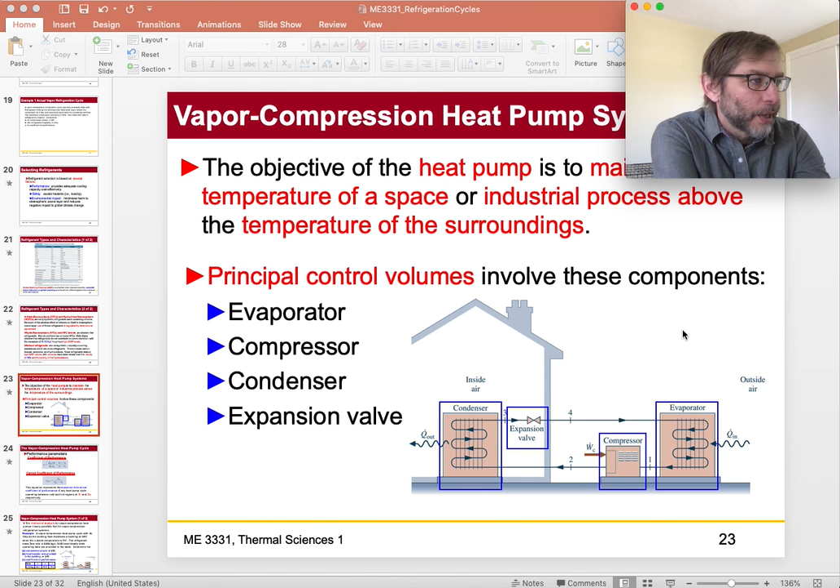In a normal house system, like I have in my house, this is the condenser out here, and this is the evaporator in here. In the case of a heat pump cycle, they're swapped. So the condenser and evaporator are different sides, and you take the heat off the high temperature side and from the cold air outside. It's the same components as a vapor refrigeration cycle, that's why I thought it'd be interesting for us to analyze it.

So the performance parameters of this are, first you have gamma, which is the coefficient of performance. It's the same idea as coefficient of performance of a refrigeration cycle, except here we're talking about what Q out is, not the QH going into the high temperature space, not the QC, which is the heat from the evaporator. So it's the heat from the condenser that we're interested in for a vapor compression cycle.

Okay, Carnot efficiency, Carnot coefficient of performance. This is just looking at the maximum possible coefficient of performance we have, which is TH over TH minus TC, which we'll do a little comparison in our example today. This equation represents the maximum theoretical coefficient of performance of any heat pump cycle operating between cold and hot regions, TH and TC. So if we have an ambient outside and a desired inside, we know what the maximum coefficient of performance can be. So we will do that.

All right, so this is just an example here. The method of analysis closely parallels that for vapor compression refrigeration cycles. It's exactly the same, except the coefficient of performance is a different thing.

So a vapor compression heat pump cycle with R134A as a working fluid maintains the building at 20 C when the outside temperature is 5 degrees C. The refrigerant mass flow rate is 0.086 kilograms per second. Additional steady state operating data are provided in the table, here's some data for states 1, 2, and 3, with the H's. Determine the compressor power, heat transfer rate to the building, and the gamma, the coefficient of performance.

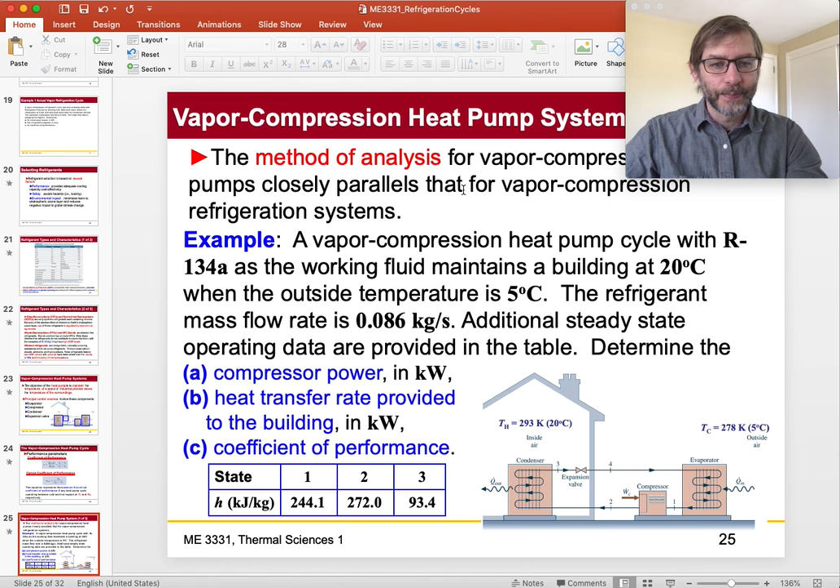Okay, so the compressor power is given the same as what we had before. So there's no heat, right? We always assume that the compressor in the Brayton cycle and the turbine in the Rankine cycle are all adiabatic. That doesn't mean we assume they're isentropic, it means we always assume they're adiabatic.

In this case, WC dot, the power into the compressor, equals m dot times H2 minus H1. Working out the compressor, if you take the values from the table, you have the mass flow and the change in enthalpy, which gives you 2.4 kilowatts as the answer.

The heat transfer provided to the building is the Q out, coming out of the condenser, which then equals, since there's no work because of the heat exchanger, H2 minus H3, which ends up giving 15.4 kilowatts.

Now, if you were to calculate the coefficient of performance, you'd see that the coefficient of performance is something like 6.4.

So 6.4 is what you get with a heat pump. And the maximum theoretical coefficient of performance of any heat pump cycle operating between hot and cold temperatures, respectively, is 19.5.

Now, one thing to notice, if you desire a certain TH, say 20 degrees C, and your TC is getting colder and colder, think about it as a thought exercise: what happens when TC gets smaller and smaller while TH stays the same? The denominator gets bigger and bigger. So as the denominator gets bigger, what happens to the coefficient of performance? It goes down, down, down.

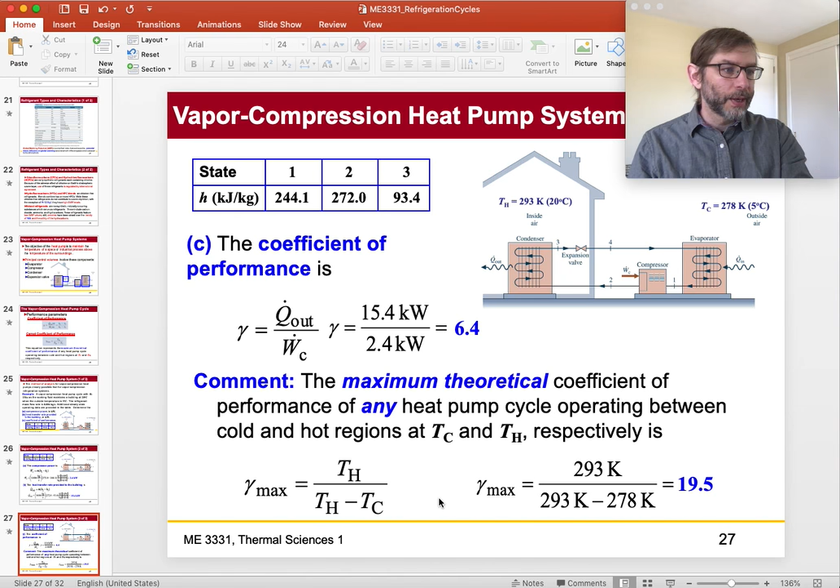Okay, anyways, let's do an example ourselves. I think that's next. Yeah, okay, my example for the day. Actually I have two examples for the day if we can get through them. Let me just get here. All right, so here's my example for the day.

So the figure and table give data for an ideal vapor compression heat pump cycle operating at steady state with R134A, like the previous example, as a working fluid. The heat pump provides heating at a rate of 15 kilowatts to maintain the interior of the building at 20 degrees C when the outside temperature is 5.

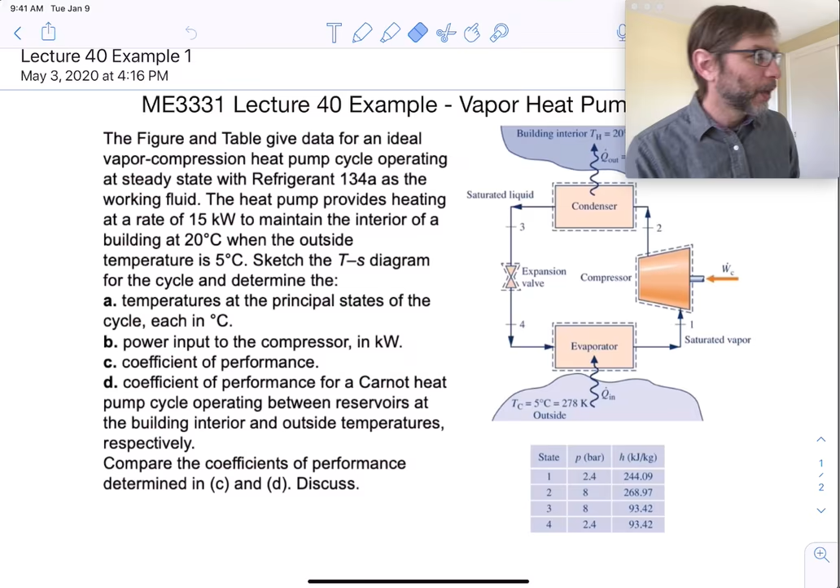Okay, so this is like the exact same thing we just did. Are those the exact same parameters we have in the example? Well, it doesn't matter because we're going to write them out and you're going to see how it's done, and it's going to be fine. So I might have picked an example very close to the one we had, but that's okay.

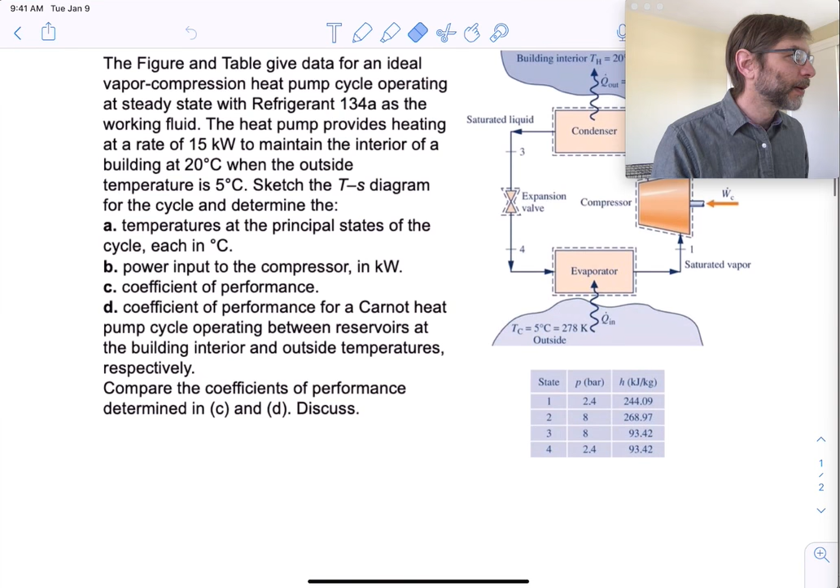Let's just go through it. We get the table here, and the pressures are what they are. So we have certain pressures that we're operating this thing over, which you can see in the table. This thing is giving you all the values, so analyzing it is really easy.

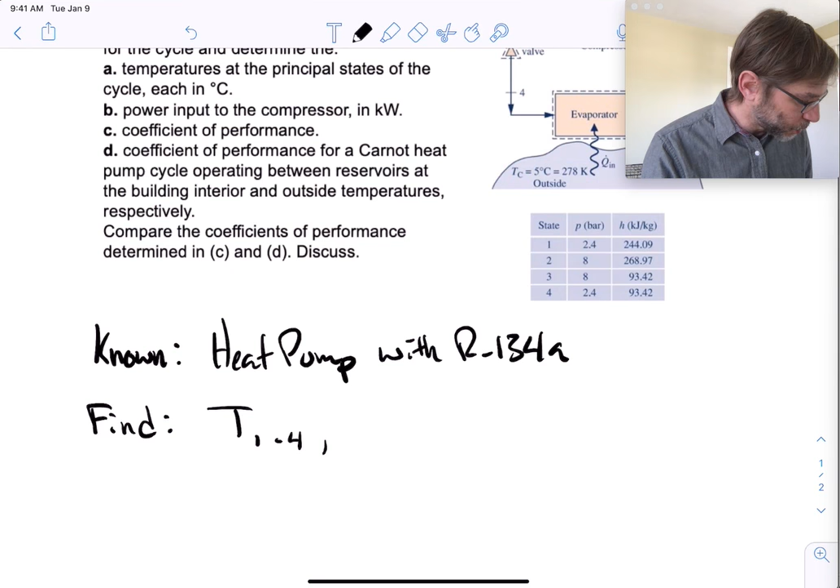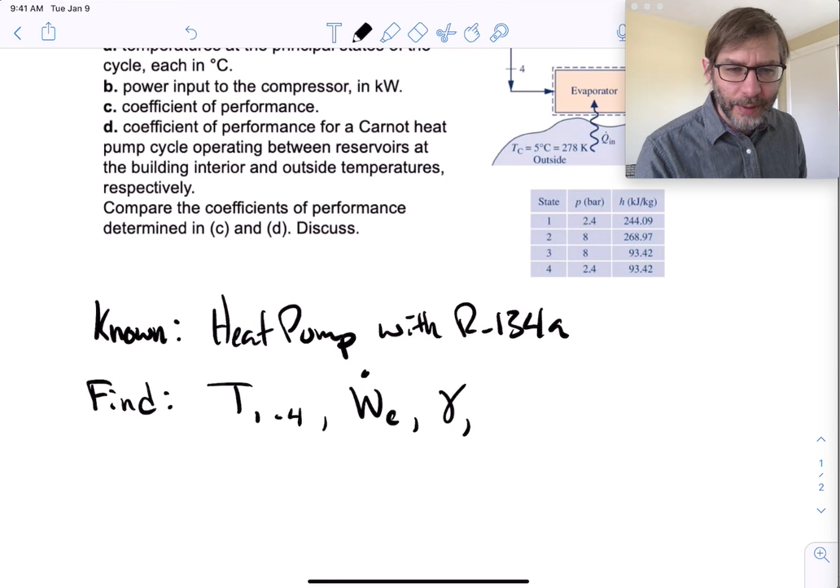So, known: heat pump with R134A. What we're going to find: temperatures at the principal states of each cycle, T1 through T4. We're going to find the power of the compressor, W dot C. We're going to find the coefficient of performance, gamma. And we're going to discuss and compare the results.

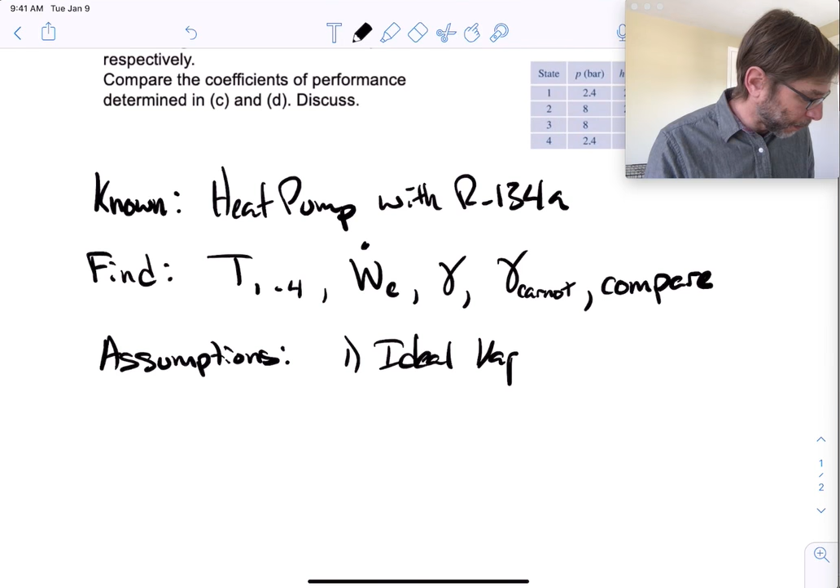Okay, so now let's do this example. Let's see, assume: first, we're going to assume that it's an ideal vapor compression heat pump cycle. Second, we're going to assume that it's at steady state.

We're going to just assume that kinetic and potential energy effects are neglected for an ideal cycle.

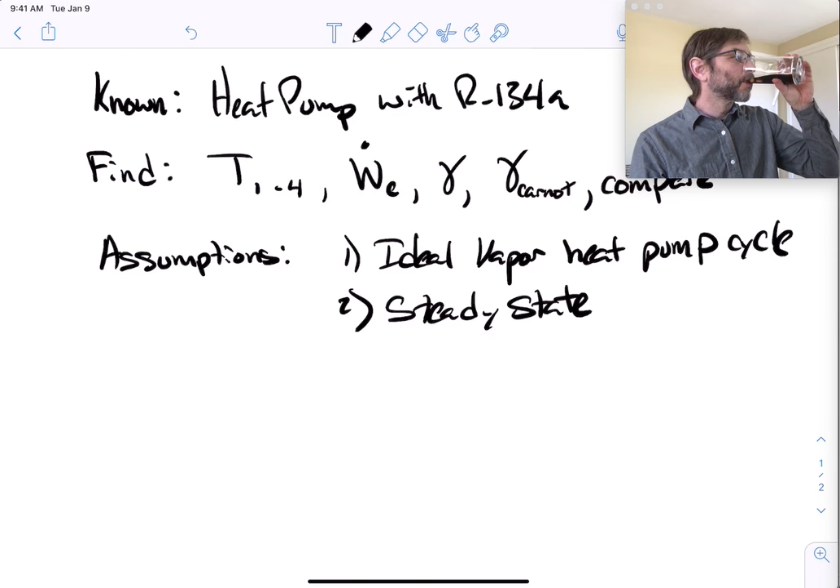It's iced coffee time of year. One of my favorite things.

Okay, let's see. I guess we're gonna do a diagram now. It's not given here—oh, it is, so the system diagram is already given.

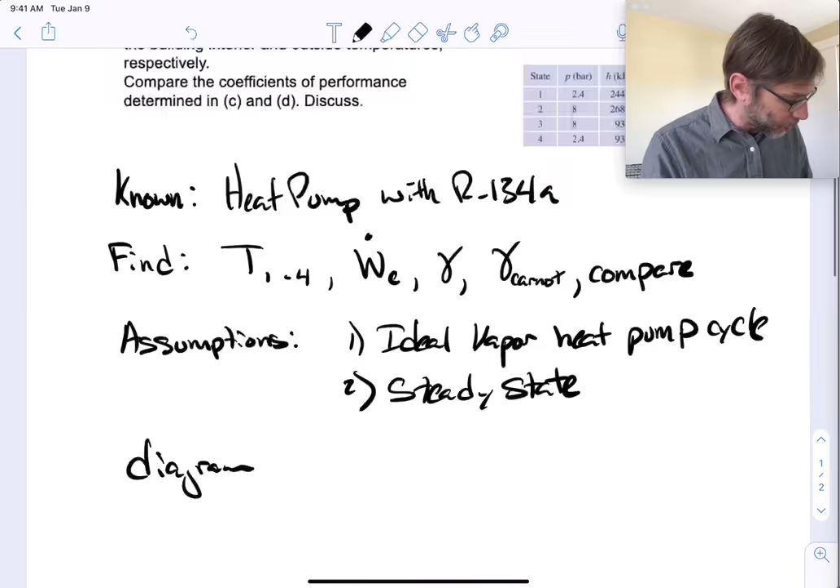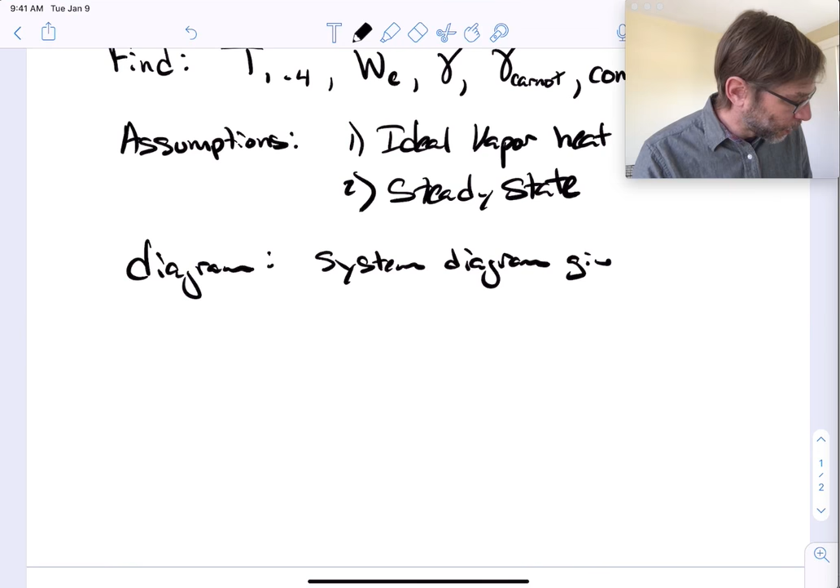I'm gonna just label it system diagram. Given. So the system diagram is given, and it has all the things: the work going into the compressor, the condenser, the expansion valve, and the evaporator.

But we're going to make a TS diagram, of course—we have to do that. Whenever you're doing these cycles, you've got to have a TS diagram. If you're doing the Otto cycle, you can do a PV diagram instead, but I'll specify the kind of diagram I want in the problem on the exam.

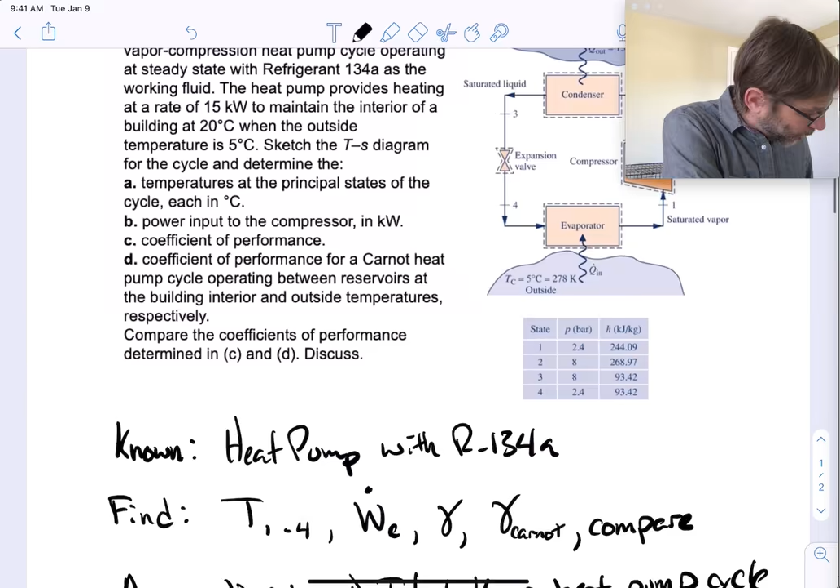So anyways, we've got a system here. It doesn't say exactly what these things are, but we're just going to assume it's an ideal cycle, since we already made that assumption, and something like this.

Remember that you have to make these things right. A lot of you didn't get this totally right on the second exam—this vapor dome thing in the TS diagram. So make sure you get this right.

2, 3, and then remember 4 goes this way. Actually, I'm going to get rid of that—I'm going to put 4 down here.

So 3 is usually right here on the vapor dome, and 20 degrees C has got to be in here, and 5 degrees C has got to be here, something like that.

Let's just put this in a different color—I like orange, so let's do that. Oops, what's going on here? Oh, I had the eraser on.

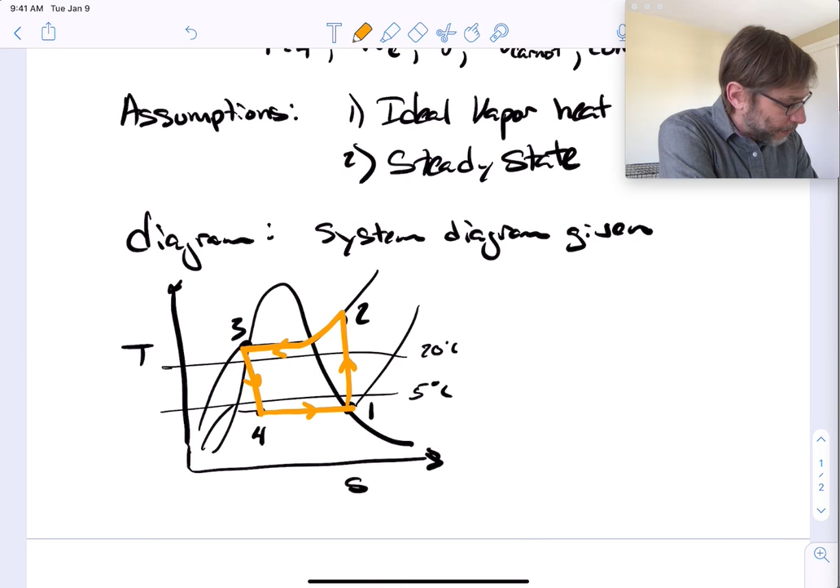Okay, let's do orange. So 1, 2, and then 3, and then 4 is like this, and then like that. It's always good to put arrows in on your cycle. So there's our cycle—that's what it looks like.

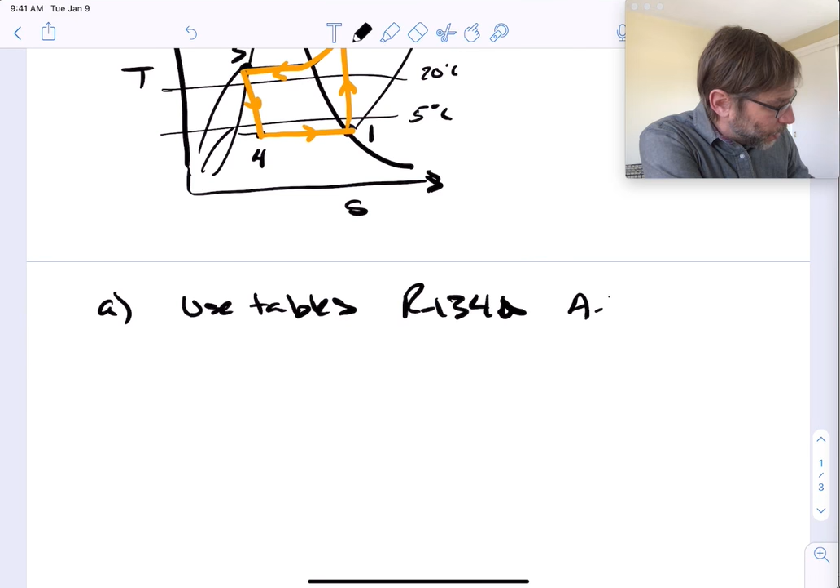All right, now we're gonna do some analysis here. We're gonna use the tables. So for part A, we're gonna use tables—in this case for R134A, which I have in my solution as tables A11 and A12 for superheated and saturated.

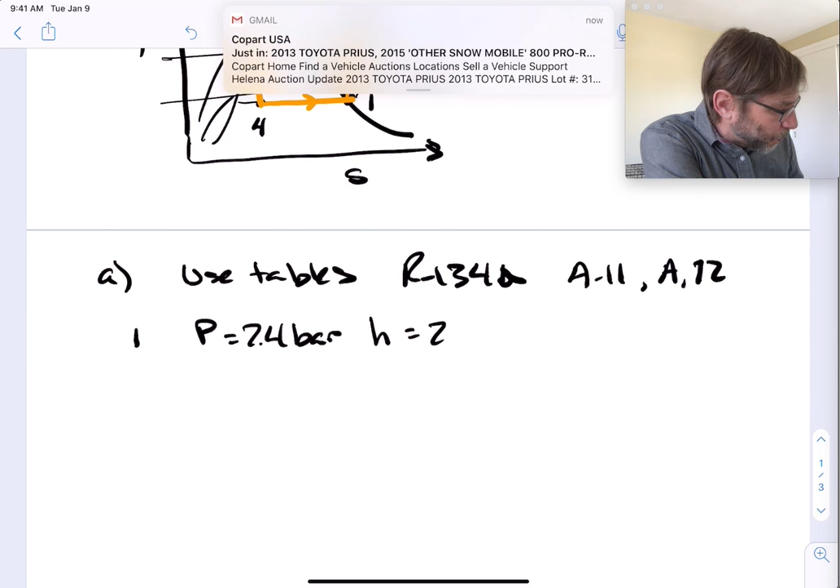So we're going to look at state 1. The pressure is 2.4 bar. H equals 244.09. And we're going to look for saturated, so it's saturated at 2.4—this is state 1.

Saturated, so if we look at this, the temperature equals negative 5.37 degrees C—that's this one right here. Okay, that's T1, H1, P1.

For state 2, we know that P2 is higher—so what did I say? It's 8 bar. So P2 equals 8 bar.

H2 is equal to 268.97, and we know that S2 is equal to S1, because it's an isentropic ideal compressor—we call it an ideal refrigeration cycle or ideal heat pump cycle.

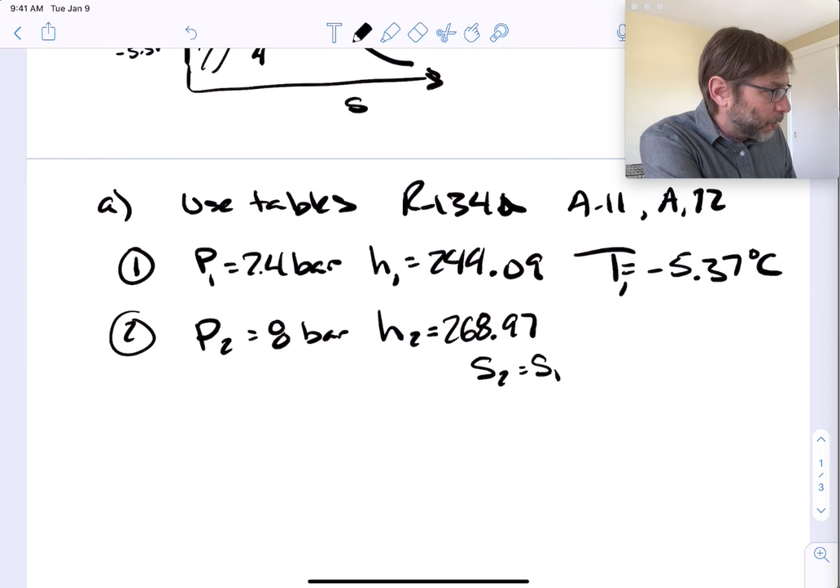So you have those two values, and then you interpolate table A12, and you get T2 equals 35.72 degrees C—that's up here, way up there.

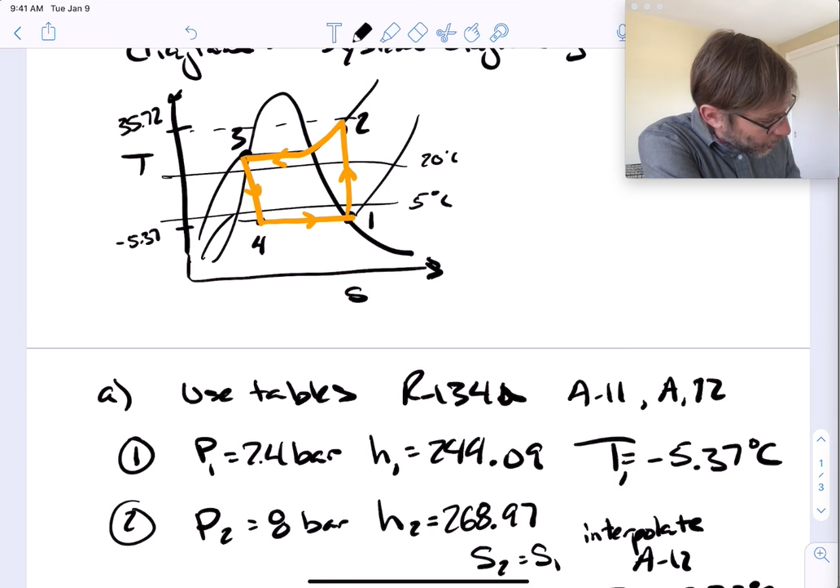And then you've got to come down again into the saturated zone. So P3 equals 8 bar. H3 equals 93.42, and T3 is equal to 31.33.

And of course it's the same—let me do a circle like I did before. We know that P4 equals 2.4 bar, which is the same as what we had at the beginning.

And we know that T4 is equal to negative 5.37, and H4, which is given in the table, is 93.42, because it's isenthalpic—kilojoules per kilogram.

So then we've got all these states, and all the temperatures. Negative 5.37—oops, I forgot to put the negative. Okay, degrees C. Here, and this is degrees C too, so it's a little colder, right?

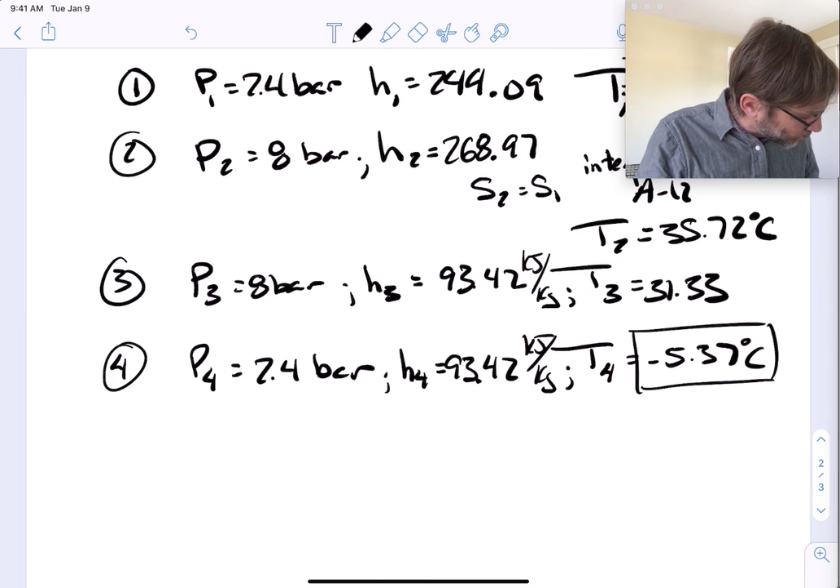31.33, which is like right here—31.33, right there. Okay, so that's all the temperatures that you need to find.

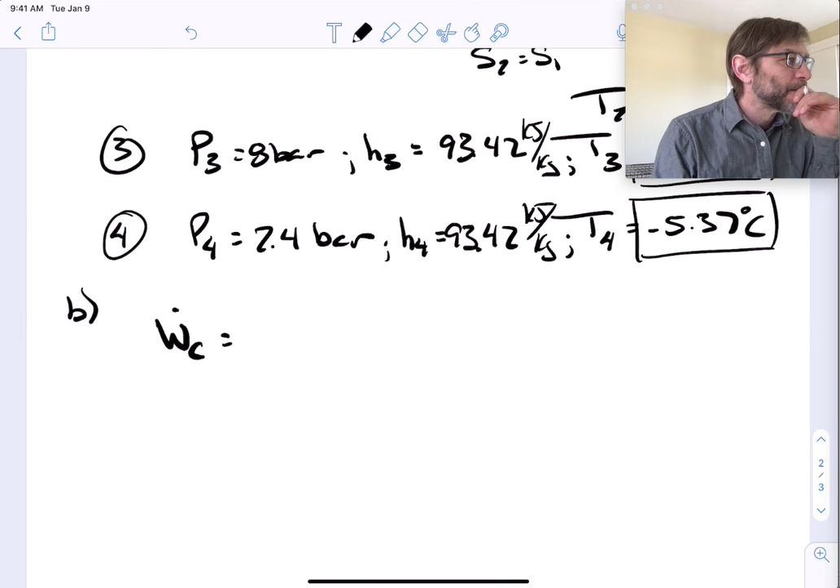Okay, part B. Part B is to find the power into the compressor. So W dot C is equal to, yeah, we have to find the mass flow rate. Well, we know it's M dot times H2 minus H1. If we want the compressor to be positive, even though it's a negative, it's going into the control volume.

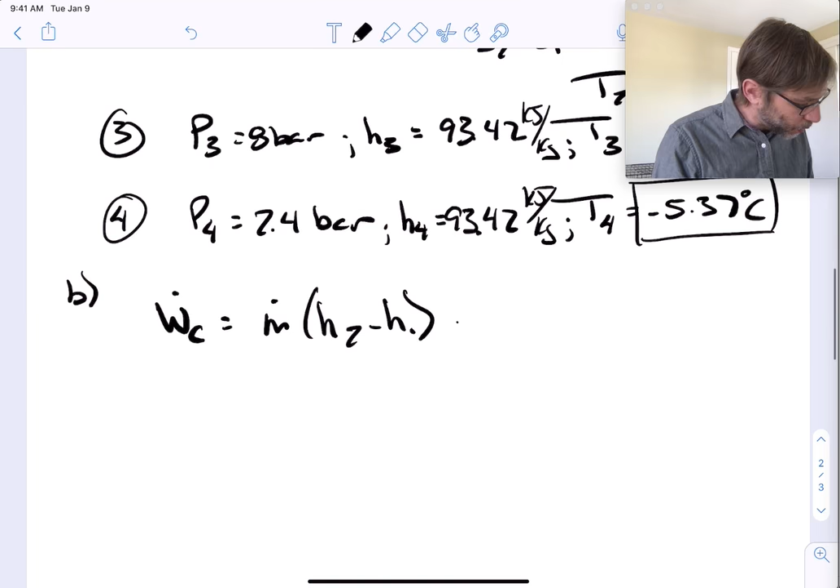But we know, what do we know? I think we know one of the heats: 15 kilowatts. Heat pump provides a rate of 15 kilowatts, so heating at a rate of 15 kilowatts. So that's QH, right? So we need to find this.

So we know that Q dot H is equal to M dot times H2 minus H3, right? Because that's the QH, and then we can find M dot this way because we know the H's and we know the QH. So if we let me just put a here, and we know that M dot is equal to QH dot over H2 minus H3.

And then if we put some numbers in here, now this is 15 kilowatts divided by 268.97 minus 93.42. And if we do that math, you get 0.0855 kilograms per second. Okay? So that's what we get for the mass flow rate.

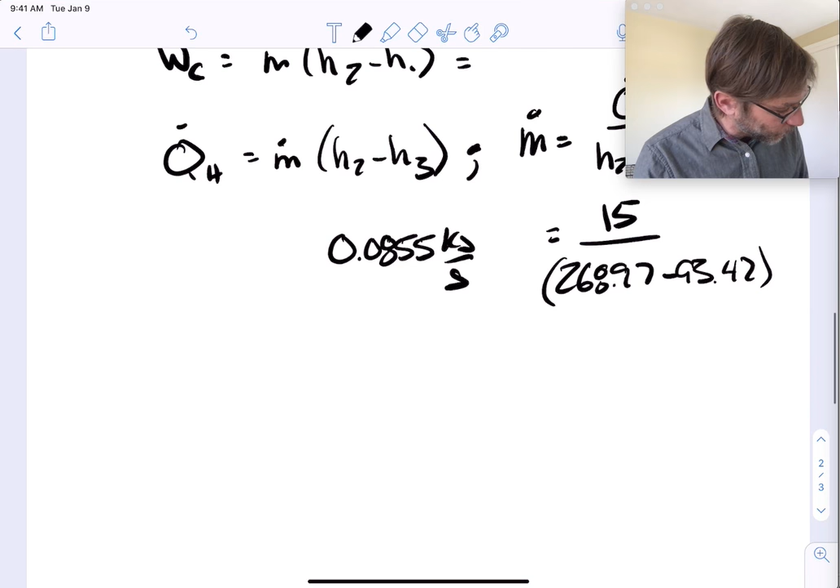Now, if we have that for the mass flow rate, now we can plug this back in. So 0.0855 times H2 minus H1, where H2 is given up here. H2 is 268.97 minus, what is it? H2 minus H1, which is 244.09. Right, and I'm going to run out of room, of course. I should have left myself more space, which is silly.

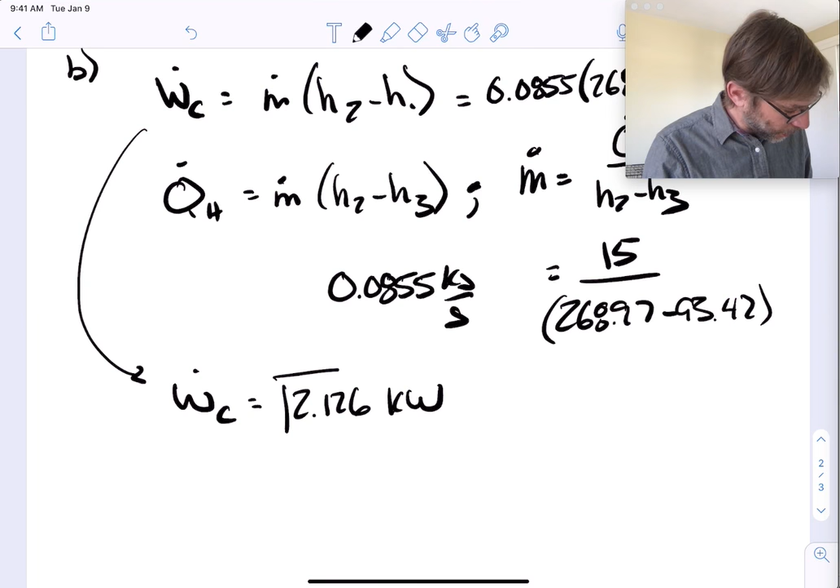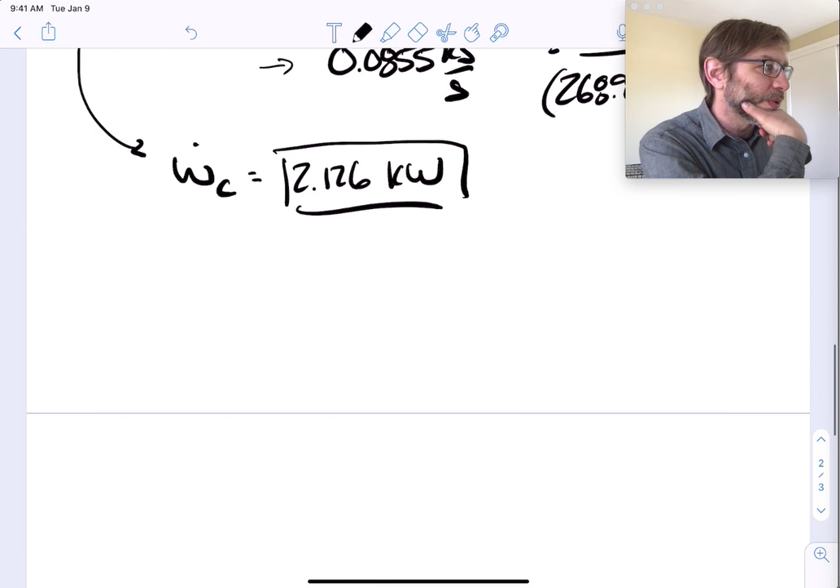Let's see, so I'll just go W dot C is equal to 2.126 kilowatts. Okay, so you see what we did. First thing we did, we found the mass flow rate, and because we had the heat, we could find the mass flow rate. That's just like one of those kind of investigative things you need to learn how to do with cycles. Okay, look at the things you're given and figure out how to get what you need. Okay, okay, so that's B.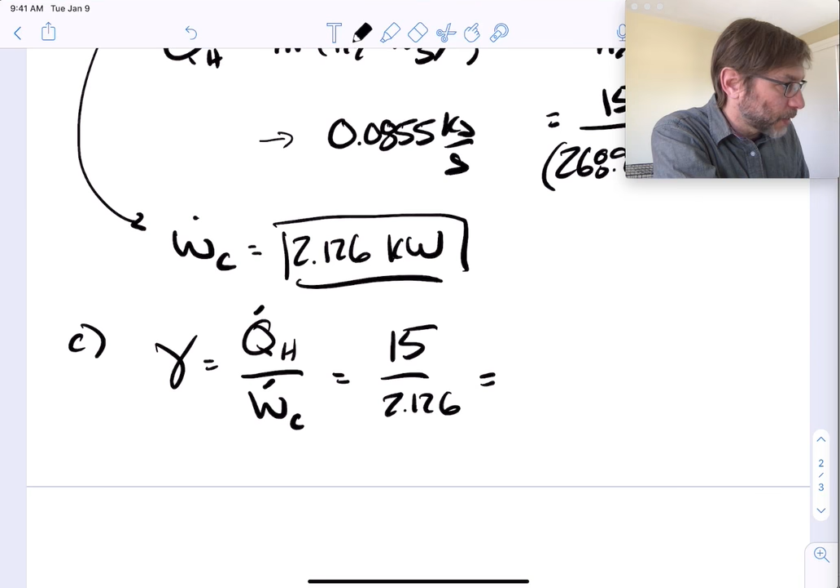C was to find the coefficient of performance. So this is QH, or what am I calling it? Am I calling it QH? Yeah, I'm calling QH. QH dot over WC, and so this, we know this is 15 over 2.126, and that's pretty high. 7.056 is our coefficient of performance.

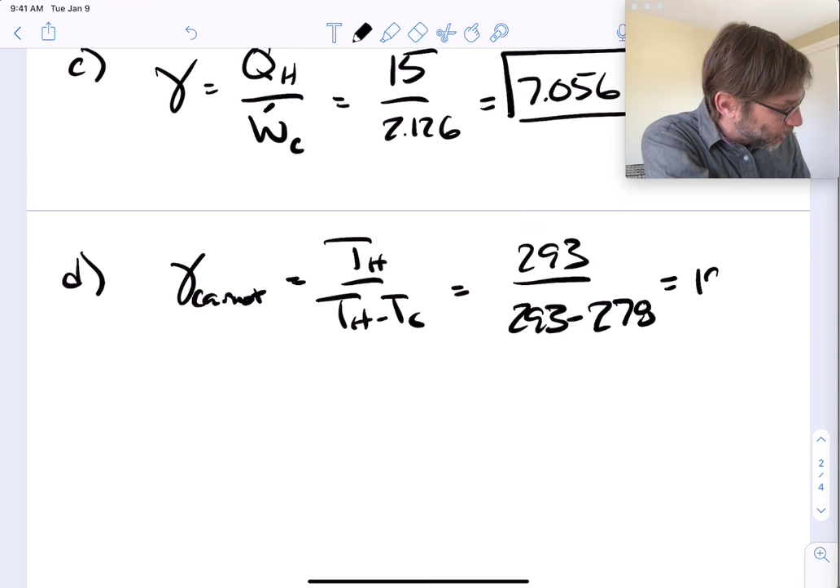Okay, let's see. Now D, of course, we said that the Carnot is TH over TH minus TC for the heat pump. And this is giving us 293 over 293 minus 278, which is the same answer as we got in the slide example, 19.53. So that's the ideal coefficient of performance.

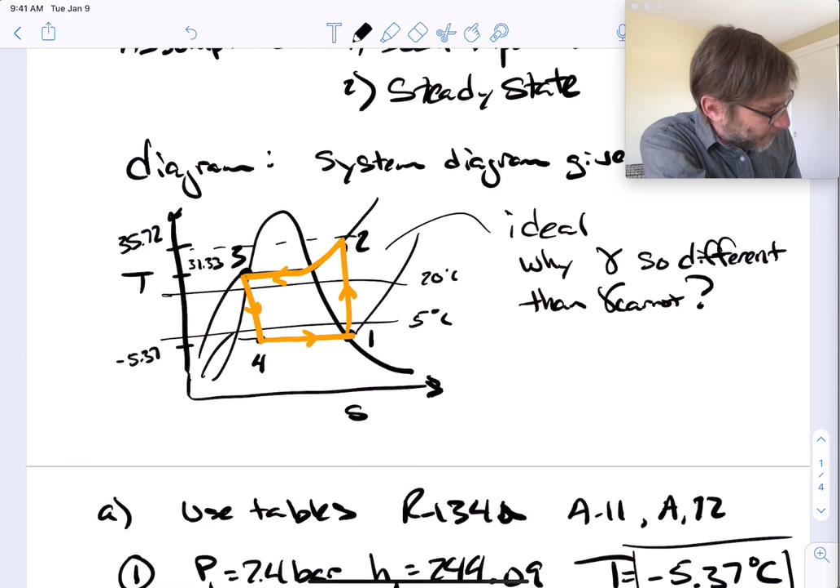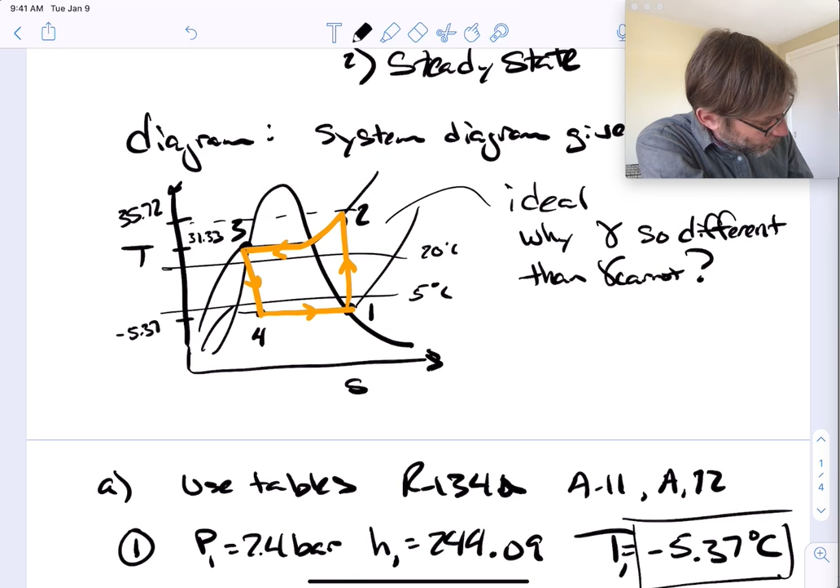Well, one of the reasons is because this is not constant temperature at the top, right? The Carnot cycle would be like maybe at an average. So let me just do this down here. So this is the discussion. I'm going to put the TS diagram here like this. And then what I'm going to do is I'm going to write our cycle in orange, okay?

Our cycle in orange is like one, oops, not like that. Like this: 1, 2, 3. Okay, 1, 2, 3, 4, right? Okay, so that's our Carnot. That's our actual refrigeration cycle. The vapor refrigeration cycle for a heat pump, okay? It's the same cycle, right? Heat pump, refrigeration cycle.

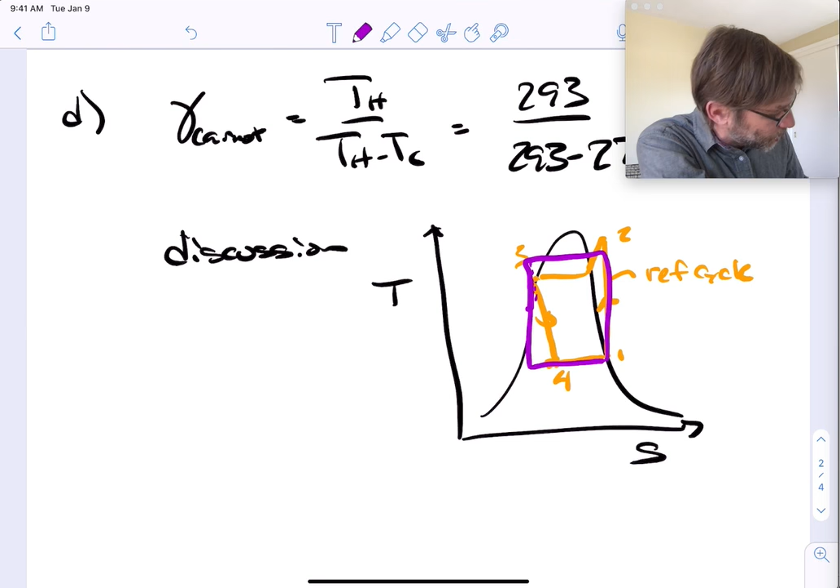Now, if I put this one in sort of purple, okay, the ideal cycle would be something like this. So maybe just pick the average temperature here, right? So I'm just going to draw it. Maybe I'll just draw it straight up like this. Okay, so anyway, so this is the Carnot. You can see that there's some area here. It's missing, right? That the vapor refrigeration cycle doesn't have. And that missing area is what's responsible for the poor coefficient of performance of the actual, right?

So because we can't actually keep an isothermal, so this is isothermal, TH equals constant, and this is S3 equals S4. So technically there would be some kind of isentropic compressor or turbine in here to get to 4. So 4S, for example, right here. Now, we could do that. It would be a little weird. You could go from 3 to 4S. I mean, so 3, this is 3S, right? If you could possibly go straight across the vapor dome, which you can't do.

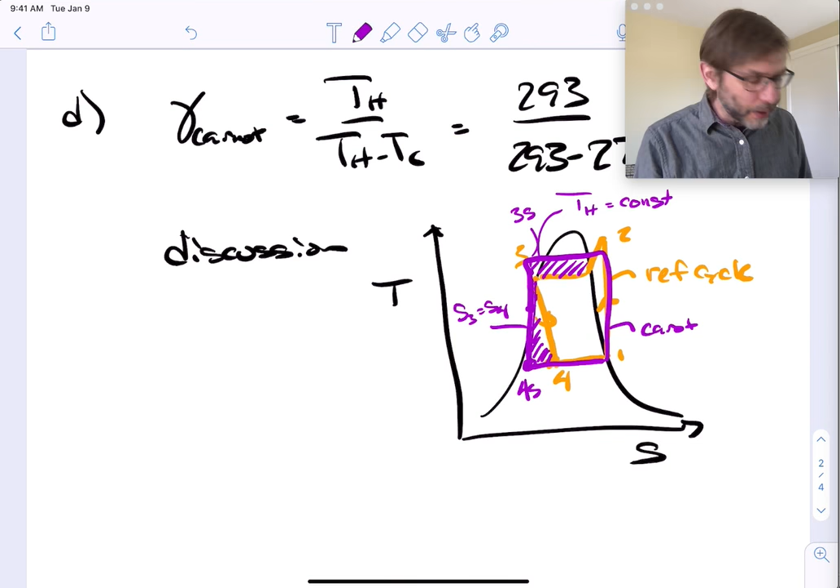So anyway, for 4S you could actually have an isentropic compressor or isentropic turbine in a vapor refrigeration cycle. The problem is that thing needs to operate in two-phase flow, and this is really liquidy over here. Like liquid, okay? So you can't have a turbine operating in liquid. It just wouldn't work. If you could figure that out, maybe you could get a few points of coefficient of performance and have a much more efficient system.

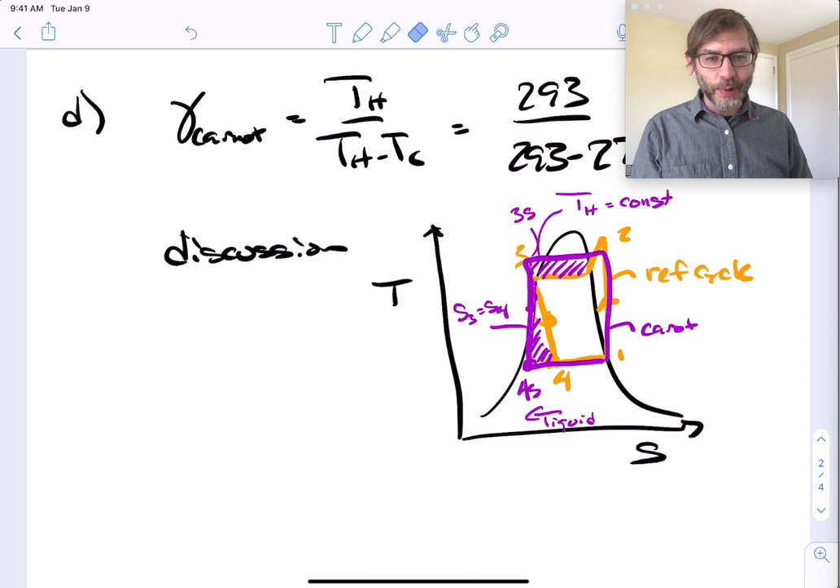The problem is having that thing operate in two-phase flow is just not going to work, and it would damage whatever it is, and you would never be able to expand it, and it wouldn't be worth the money. You wouldn't get anything out of it. The efficiency would be poor, so you might as well just put a valve there. That's the reason. There's more area under the curve there - you get more cooling capability or heating capability depending on how you run it.

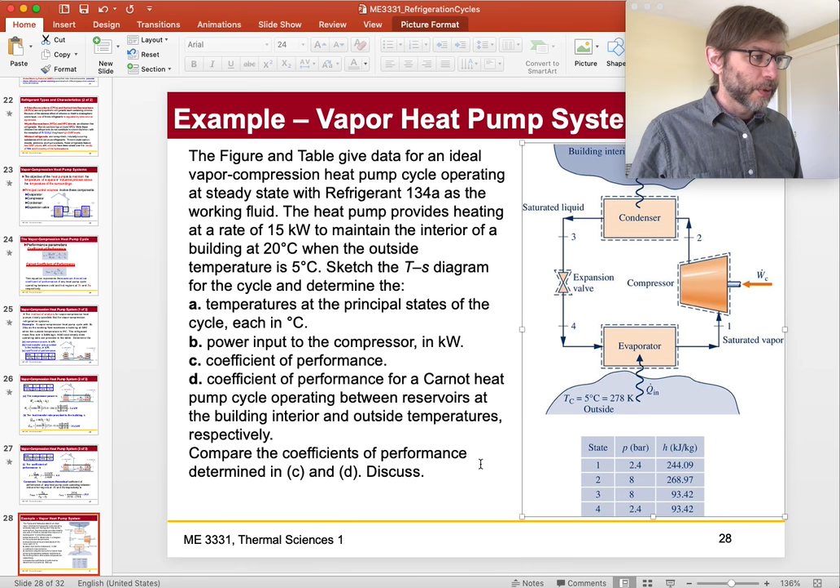Okay, so where are we at time wise? 30 minutes. So let's do one more thing. Okay, so that's the vapor heat pump cycle. Please review it, it's an important thing to go through. Let me get rid of this and make my slides bigger.

All right, now let's talk about one more thing: the Brayton refrigeration cycle. Just like we can operate the Rankine cycle backwards to do a refrigeration cycle, we can operate the Brayton cycle backwards too, using air or gas as a working fluid. So it's an ideal gas cycle, not a vapor refrigeration cycle. The working fluids of a vapor compression system undergo liquid vapor phase change. In a Brayton refrigeration cycle, the working fluid remains a gas.

The Brayton refrigeration cycle is the reverse of the Brayton power cycle introduced in Chapter 9, and it looks like the following. Essentially you've got a compressor-turbine situation. Instead of constant temperature, they're adiabatic and isentropic, and reversible, so they're isentropic. Of course there's maybe realistic behavior, so that's why the dotted line is here. And you've got constant pressure heat exchangers, so they're not constant temperature processes, but you've got a pretty good cycle here. It's going to be a lot different than the Carnot, but it's going to give you some cooling effect.

So you run it backwards. You put some heat in here, you put some work rather inside the compressor. You might regain some of the power in the turbine, like what I was talking about possibly doing with the vapor refrigeration cycle. So it goes like this.

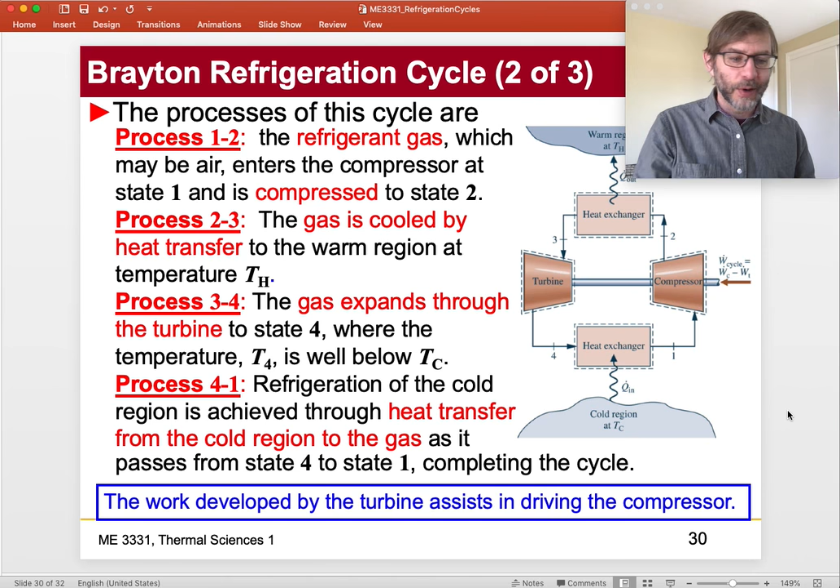Never actually operated one. The Brayton refrigeration cycle's coefficient of performance is given the same as it is for the vapor refrigeration cycle: it's the Q in, which is the heat transfer from the cold region, the room or whatever you're trying to cool, into the heat exchanger, over the difference in work. In this case it's not just one work, the compressor work - it's work minus the turbine work. So the turbine actually gives you some benefit, extracting some work which you then feed to the compressor, giving you TH minus TC.

So you have to keep the TH below state 3. State 3 is the point at which you have this heat exchanger. So the TH has got to be below there, and the TC has got to be above 1. So you see, there's not much of a difference in temperature between TH and TC.

So this may be really only very useful for systems where the temperature difference is not very high. Okay, and that's what we'll probably come to here in the end. Okay, so let's just do an example of it and see how it works. And this will be our final example over the day. Hopefully we don't run over time.

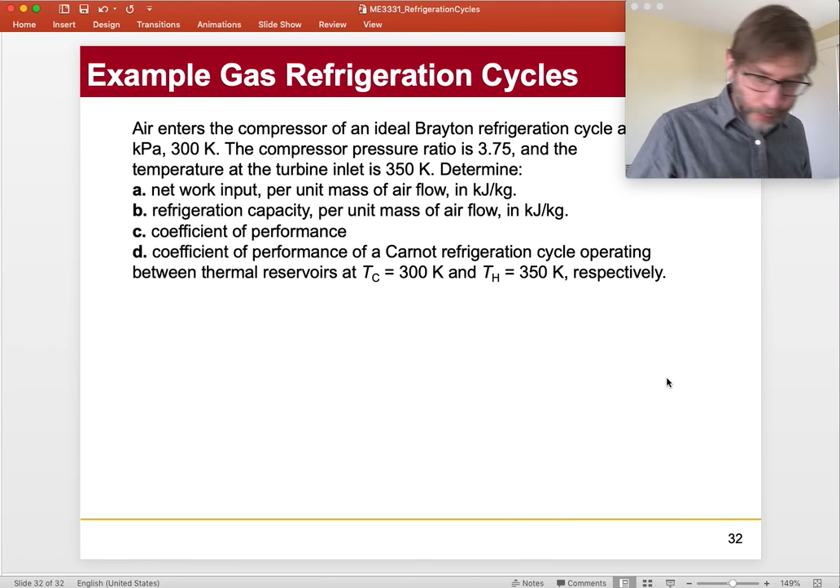So example 2, let me go here. Here it is. Okay, gas refrigeration cycle. The air enters the compressor of an ideal Brayton refrigeration cycle at 100 kPa and 300 K. The compressor pressure ratio is 3.75, and the temperature at the turbine inlet is 350 K. Determine the net work input.

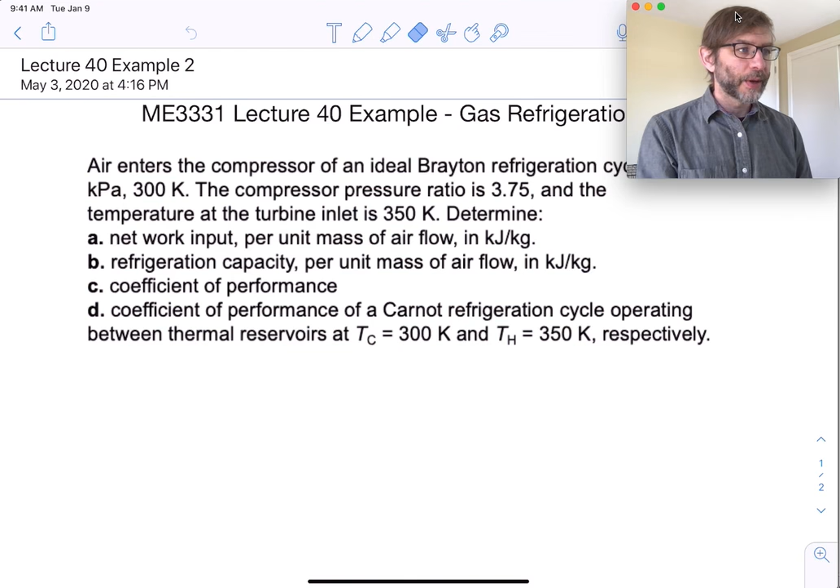So yeah, we got to put work in. We're not getting net work out of this cycle. Per unit mass flow, in kilojoules per kilogram. Refrigeration capacity - remember the capacity, that's the Q in, right? Capacity is what we're pulling out of the cool space. Coefficient of performance of an ideal Carnot refrigeration cycle operating over the same 50K.

Okay, so what do we got here? Okay, so known - let me get to my right thing here. Okay, so known is what we have. We know we have here is a Brayton refrigeration cycle. Okay, we'll just say with air. Is it air? Oh yeah, air as the working fluid.

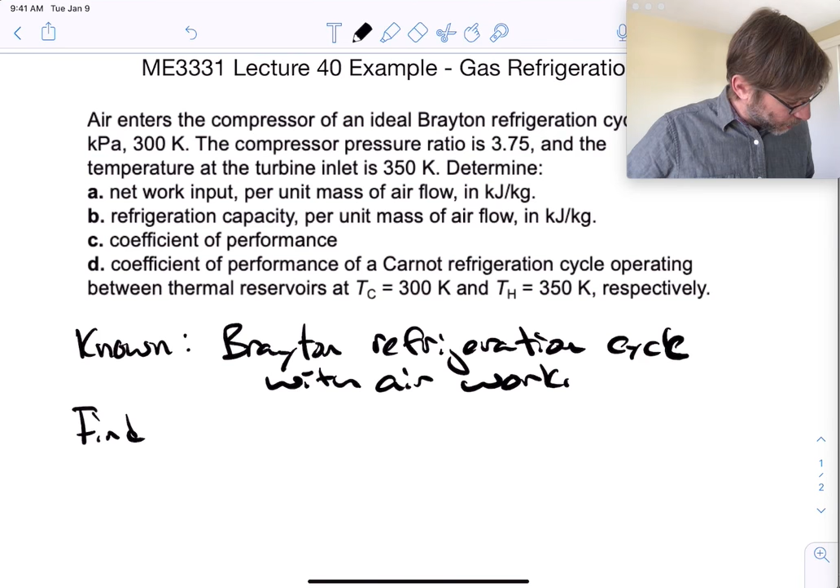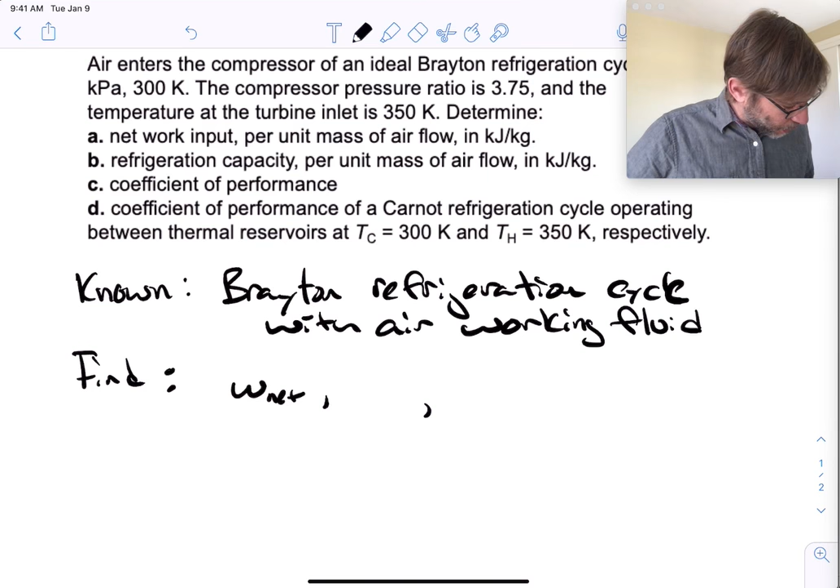Okay, what we're going to find is the net work. So work in, or just call it work - well, we're going to call it work net, because the net work is the compressor minus the turbine, right? Refrigeration - this is Q in, kilojoules per kilogram. We're going to do this per kilogram, with little w's. Okay, Q in and coefficient of performance - so this is a refrigeration cycle, so we're going to call it beta, and we're going to call this one the Carnot coefficient.

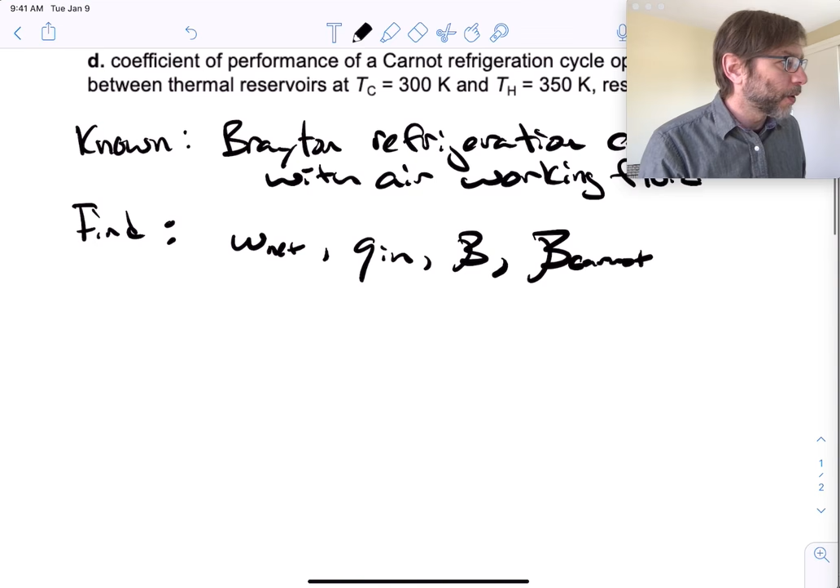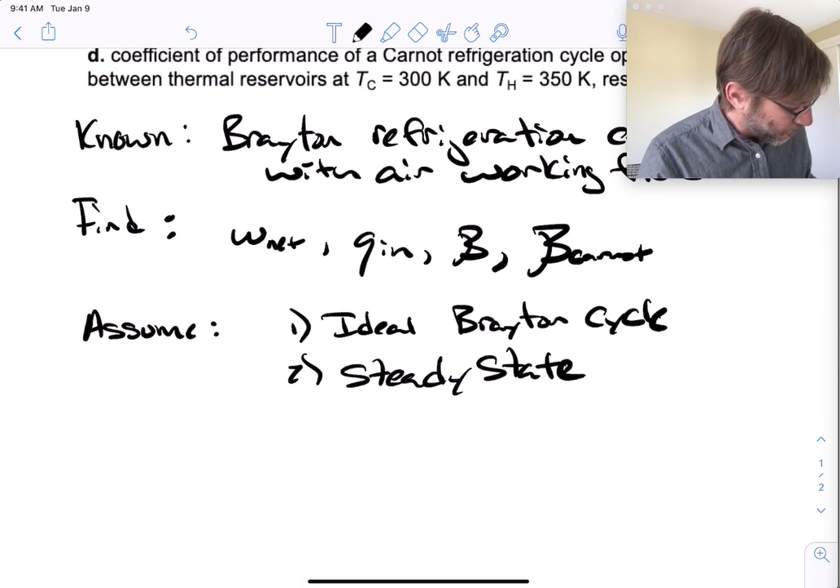Right, okay, so let's do this, and we'll discuss it a little bit if we have time. All right, so now let's see. Assume: 1, it's an ideal Brayton cycle, it means there's constant pressure and isentropic processes. 2, at steady state. Right, cycle, so that means that everything is going constantly. Let's see, then we can find here the diagram.

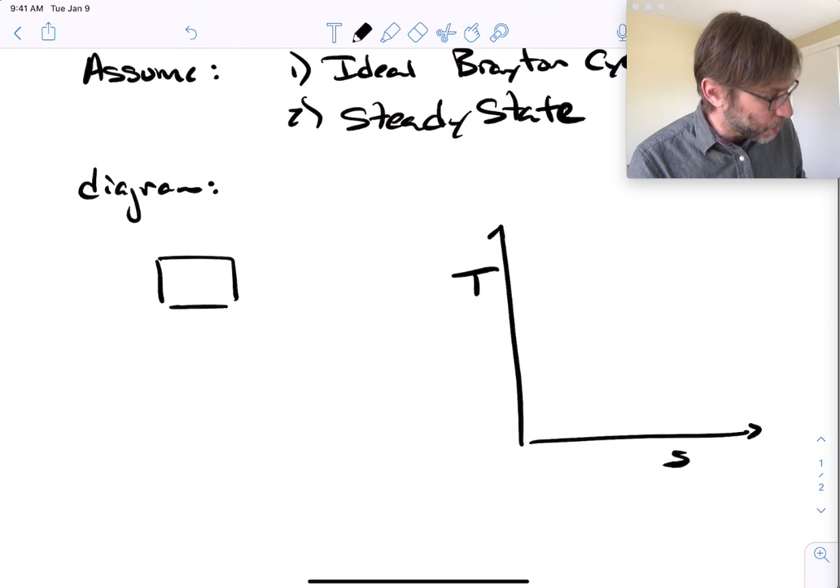So let's make a diagram. Well, there's 2 diagrams we can make. First, we can make a T-S diagram. And then we got to make a diagram of the actual cycle itself. So I guess we'll just make a diagram of the cycle itself first. And that looks like what we just had - so there's a heat exchanger, a compressor, and a turbine.

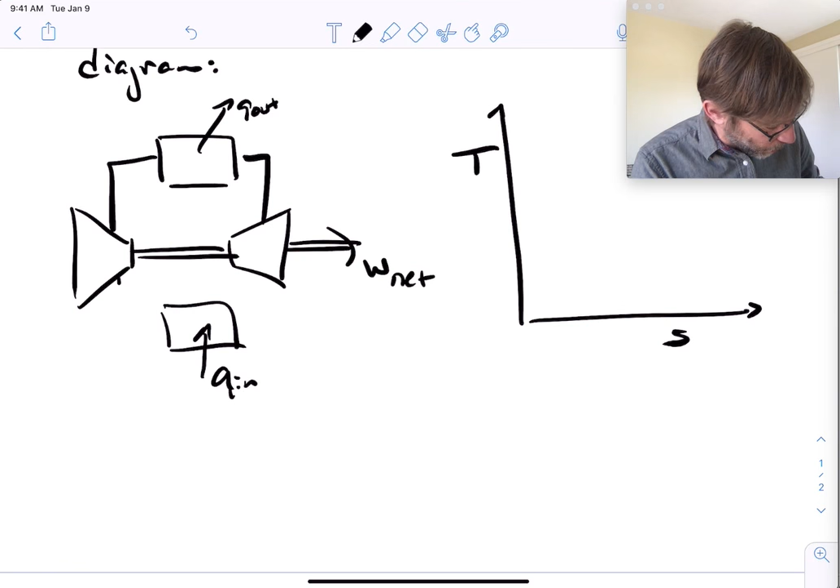They're attached, their shaft is attached, and then there's some work net right there at the control volume. At the outside, if you take the system diagram around the entire thing, there's 2 heat exchangers here - there's a Q in and a Q out. Now we got to have some flows going around here. I guess we're going to assume this is 1, this is 2 - doesn't look like 1 - 1, 2, 3, and 4. Okay, turbine, compressor, this thing we're calling the heat exchanger. And I guess these are just heat exchangers - there's no condenser, right? It's not condensing or evaporating anything. It's a gas, so it's not doing any of that.

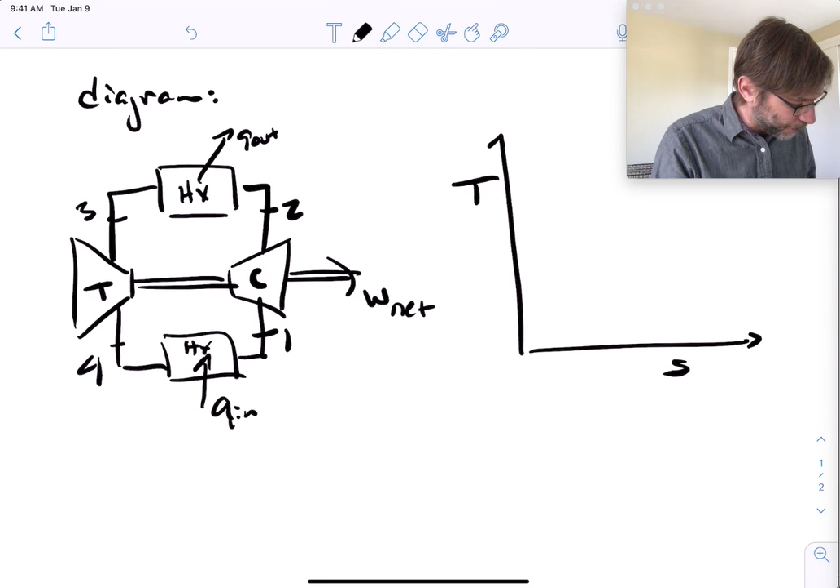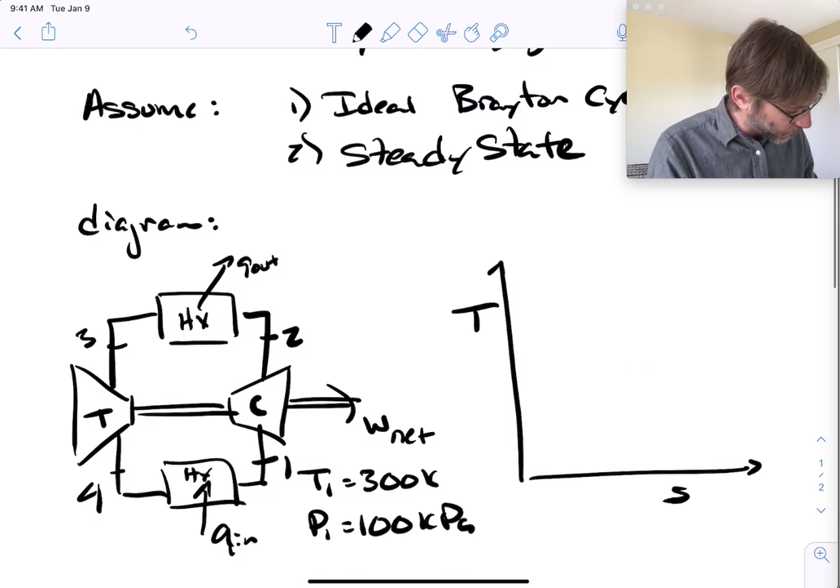Okay, then what we got to do is draw - we can put T1 equals 300 K and P1 equals 100 kPa. We can put our states in the diagram. And there's a pressure ratio - did we get a pressure ratio? Yeah, 3.75. So this is P2 equals 3.75 times P1.

And then T3 - are we given T3, the temperature at the turbine inlet? So T3 is equal to, what is it, 350 K. All right, so that's what we got. Now we're assuming that, of course, the heat exchanger operates all the way to what we call the pinch, where the outside ambient temperature is exactly the same as the inlet of the turbine, right? So we're pinching it all the way to the end of the possible heat that you can exchange. So now the cycle looks like this.

So we got like, we're gonna have 350 here and 300 here, right? And so I got to make sure that 300 is like over here and 350 is like over here.

So 350 is here, and then this guy, of course, has to go up in constant pressure. Oops, get rid of that. That was horrible, I think my iPad moved there. There we go. And then this one, of course, drops straight down here, and this one goes like this, so it's going to drop below.

So we got compression in 1 to 2, right? So this is compression, 2 to 3 is the constant pressure. So this is 375 kPa because it's 3.75. This is 100 kPa.

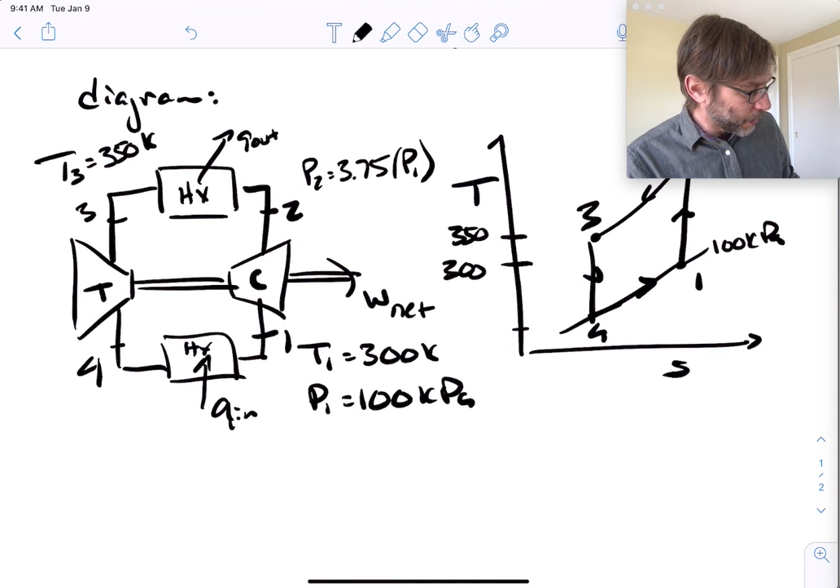So you're going to be able to cool this, but the ambient temperature can only be, so 300 is here, so the ambient temperature is like this. So it's very cold, but it can only get to 300 because you have a big change in temperature across the heat exchanger, right? All right.

Let's see, so we just put this, we'll just make sure everybody knows that this is Q out and this is Q in. All right, we're done with that. Okay, so now let's do the analysis.

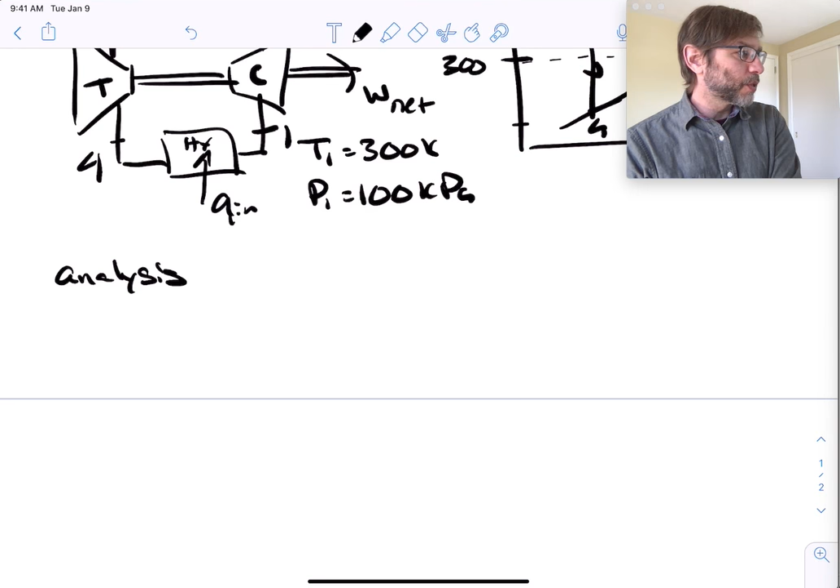Okay, so the analysis is going to be pretty straightforward. So essentially, let's just do the states. So when we did the Brayton cycle, remember, we just find these different states. And then since we can look them up in the table, we didn't say it was a cold air cycle, so we have to look them up in the table.

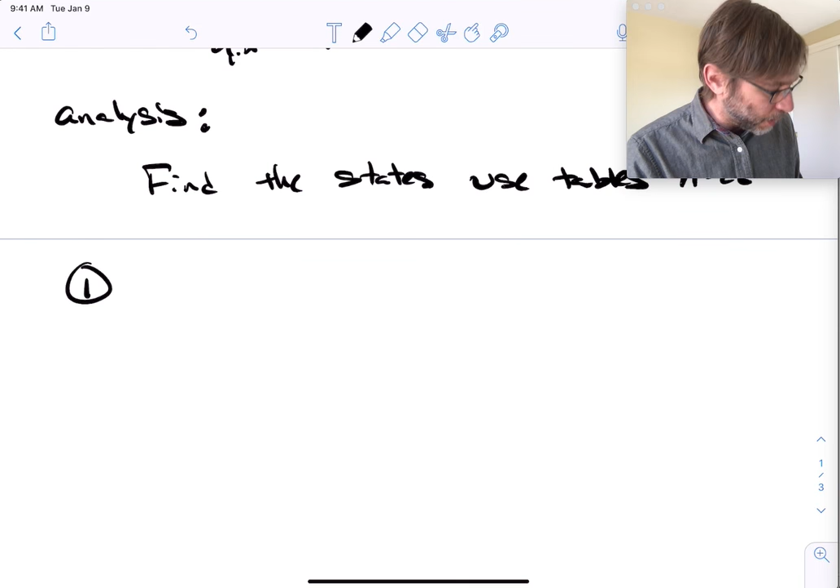We use tables, A22 is the ideal gas table. So state 1, this is going to give us T1 equals 300 K and H1 equals 300.19. Remember, we're doing H. And you remember why, right?

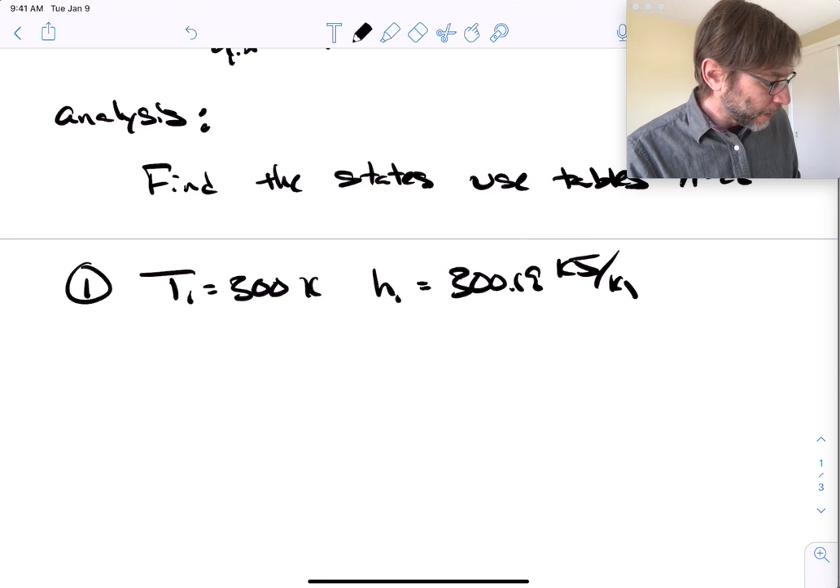Because it's a steady state, steady flow. I mean, it's a control volume process. So we always use H because it accounts for the flow work.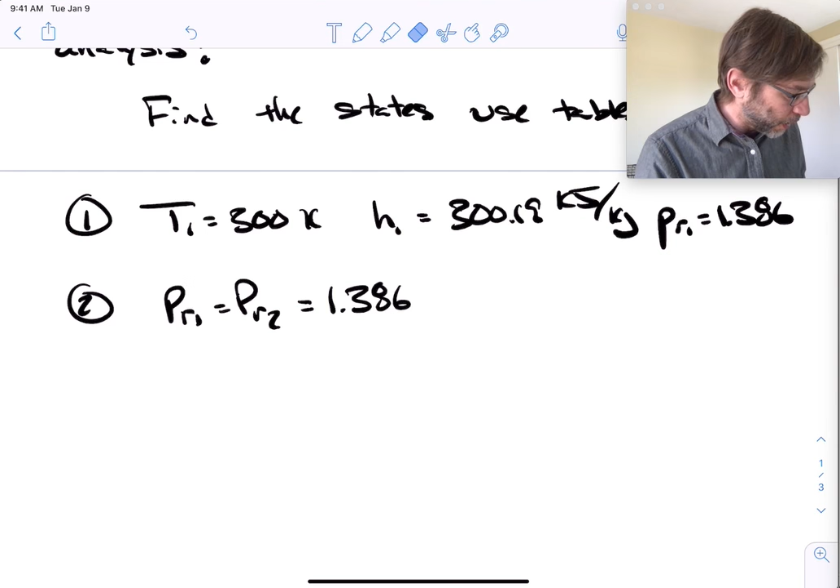And T2 is equal to then, well, I guess we don't even need T2. We don't need T2, we just need H2. So if we need T2, we could find it very easily. So this ends up being 1.386.

So P2, we know P2 is equal to 3.75. So then we're going to get PR2. Oh, I'm sorry, that's not right. It's S2 equals S1. Here, let's do this again.

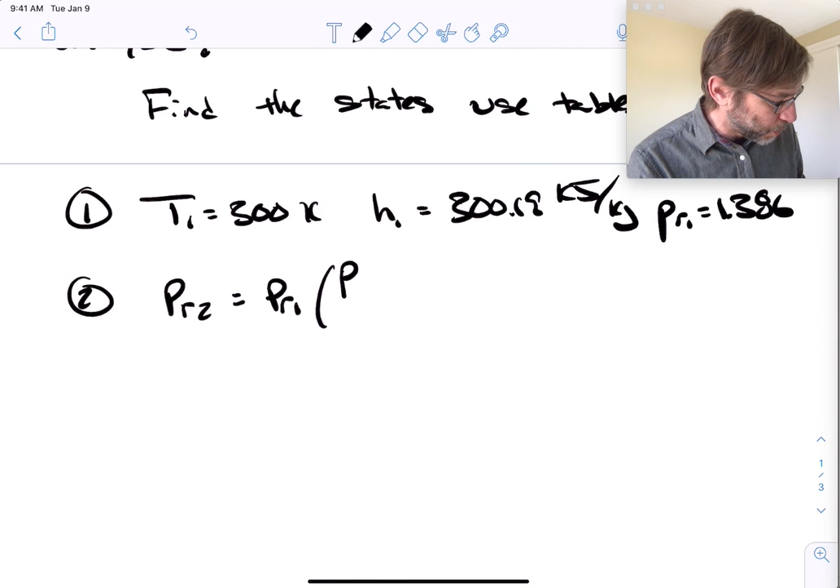PR1, right, is equal to PR2 is equal to PR1 times P2 over P1, right? Because PR2 over PR1 equals P2 over P1 for an isentropic process for S equals constant.

Only, don't use that for a non-isentropic process, but it's very convenient. And so then we end up getting something like 5.198. And if we use the table, we can get H2 is equal to 438.3 kilojoules per kilogram through interpolation

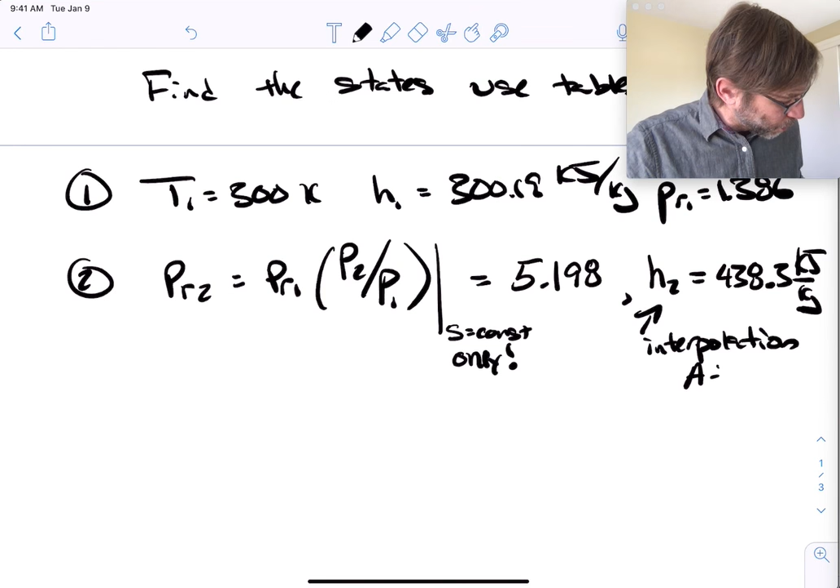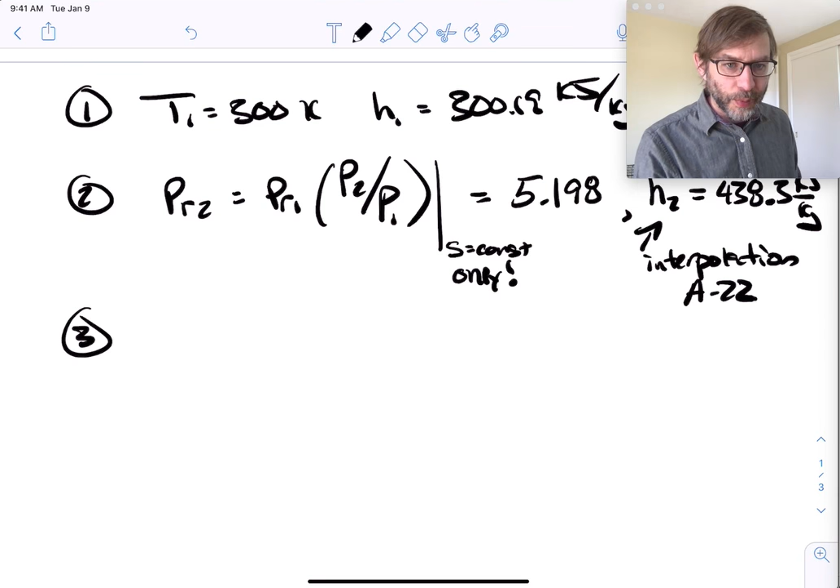on A22. Okay, I'm not going to do it because we're running out of time here at the lecture. Okay, so 3, and you should know how to do it. You should know how to interpolate the tables. It's important. I'm not going to give you too much interpolation to do in the exam, but you're going to have some, so be ready.

Okay, T3 we know is equal to 350K, and we can know H3 then directly because H is only a function of temperature for an ideal gas. Remember that.

Kilojoules per kilogram. And then we don't know, oh yeah, we need to know PR3 because we're doing a Brayton cycle. So we have an isentropic expansion, 2.7, what is it? 2.38. Okay, so then we'll do the same thing we did above.

So we know PR4 equals, well, we'll just do PR4 equals PR3 times P4 over P3, which is equal to 2.38. Oops, that's ugly.

2.38 times the pressure ratio, but it's 1 over the pressure ratio because we're expanding, right? Because it's PR4 over PR3, which is 1 divided by 3.75.

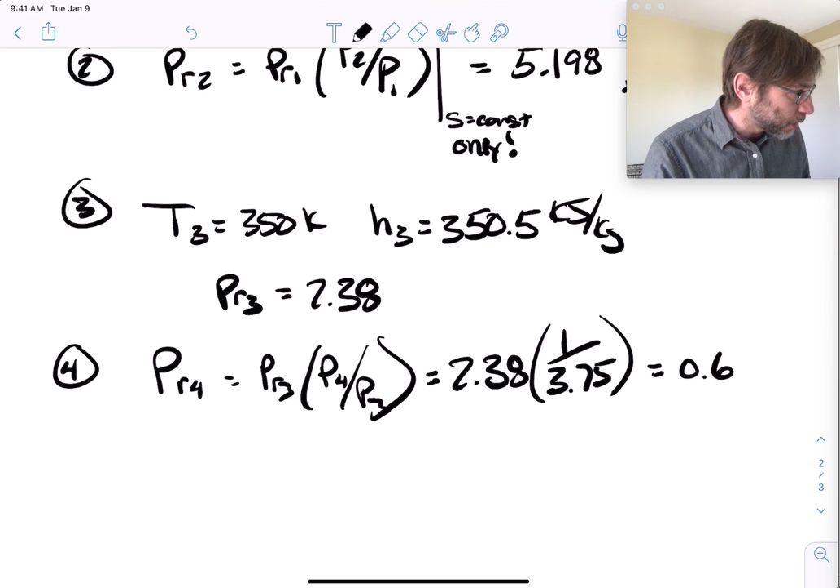So pressure ratio equals 0.634. So then we can interpolate again, and we interpolate again in A22, we can find the H. So H4 is equal to 239.9 kilojoules per kilogram. And then we have all the H's, which is all we need. So the work output would be work is equal to, let's just do this.

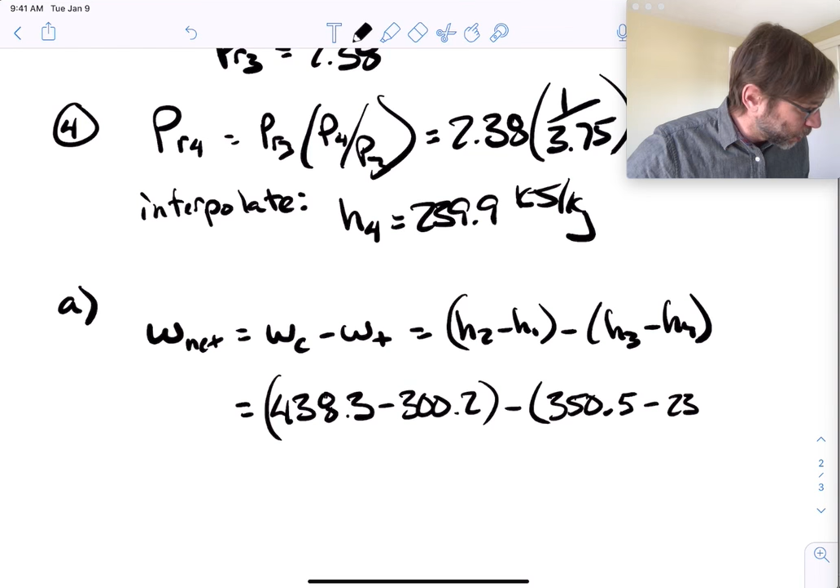Let's just do little w's. Net is equal to the work compressor minus the work of the turbine, which equals H2 minus H1 minus H3 minus H4, to keep everything positive. So then we're going to end up getting equals 438.3 - I'm just going to keep one decimal place - 300.2 minus 350.5 minus 239.9.

Okay, which ends up giving us a net work that we put in of 27.6 kilojoules per kilogram. And so if we had the mass flow rate, we could find the kilowatts. So if you had 1 kilogram per second of airflow through this thing, then you could essentially say that's 27.6 kilowatts.

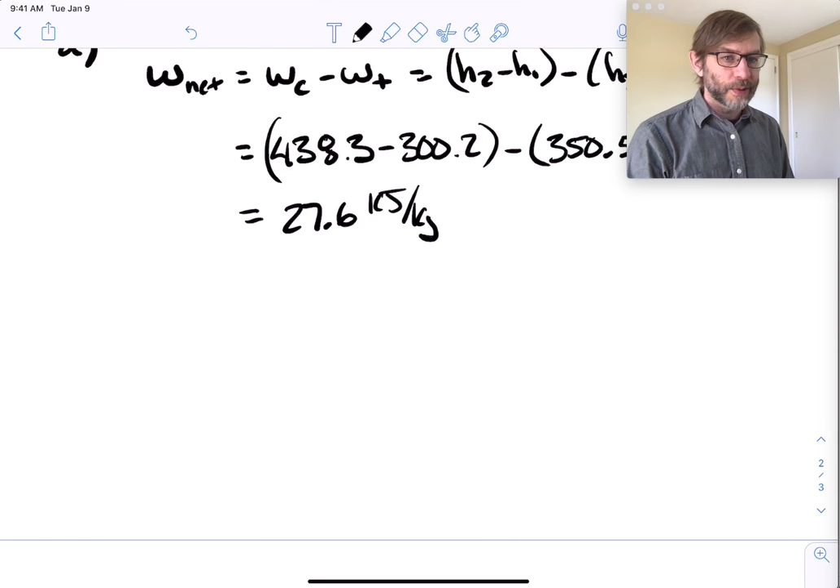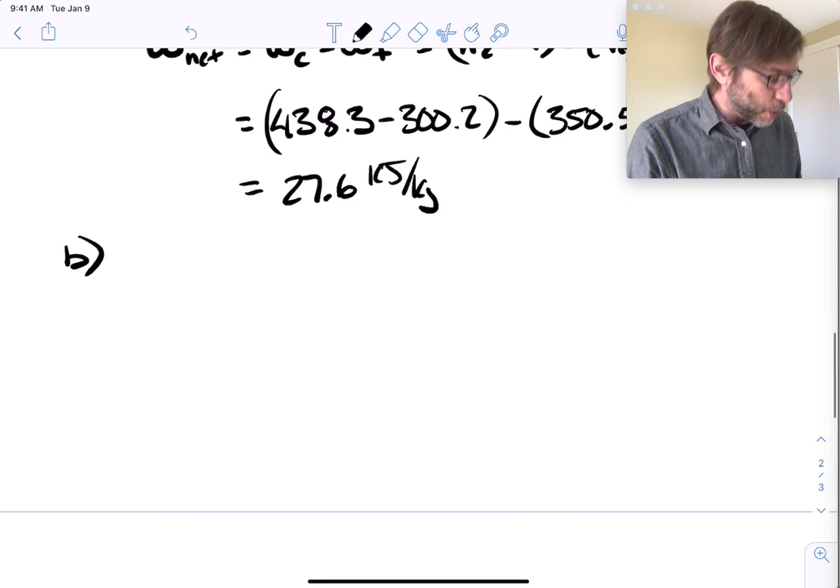Okay, so the last thing - well, we have a couple more things to do. So B, refrigeration capacity, so this is Q in, is essentially just equal to H1 minus H4, right? Because it's 1 to 4, right in here, right here, 1 to 4.

Okay, so H1 minus H4 is equal to 300.2 minus 239.9, which is equal to 60.29 kilojoules per kilogram. I should put a box around these - these are our answers.

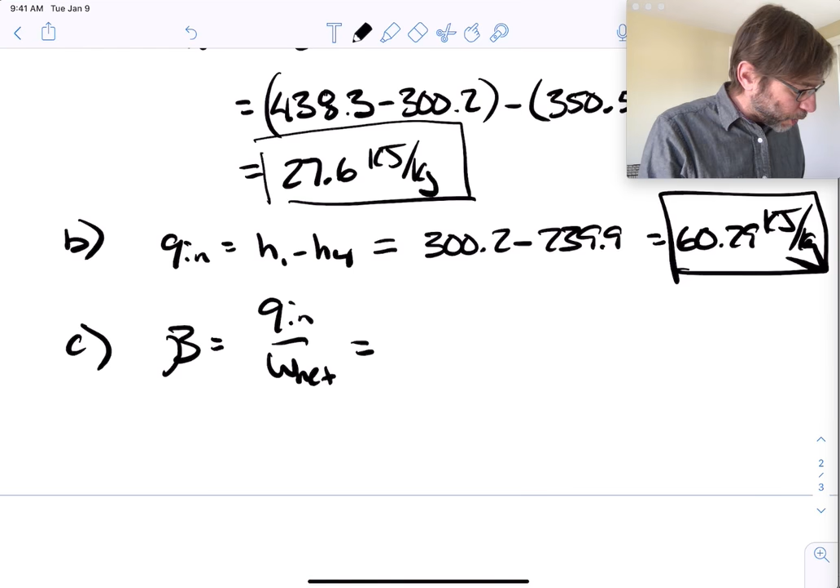So then the coefficient of performance, beta, is equal to Q in over the work net. Remember, it's the work net because we're getting some work back. We wouldn't want to just count the compressor work. We get some turbine work back. Looks like you get quite a lot actually, 350 minus 240. So that's quite a lot of work that you get back, so you should probably count that in your net work calculation.

60.3 divided by 27.6 gives you a coefficient of performance of 2.19. That's pretty bad for an ideal cycle. An ideal cycle is 2.19. We were getting like 6s and 7s with the vapor refrigeration cycle. It's not that great.

Okay, so what's the Carnot? In this case, it's TC over TH minus TC. Remember, because TC is what we want. And so this is 300 over 350 minus 300, which is equal to 6.

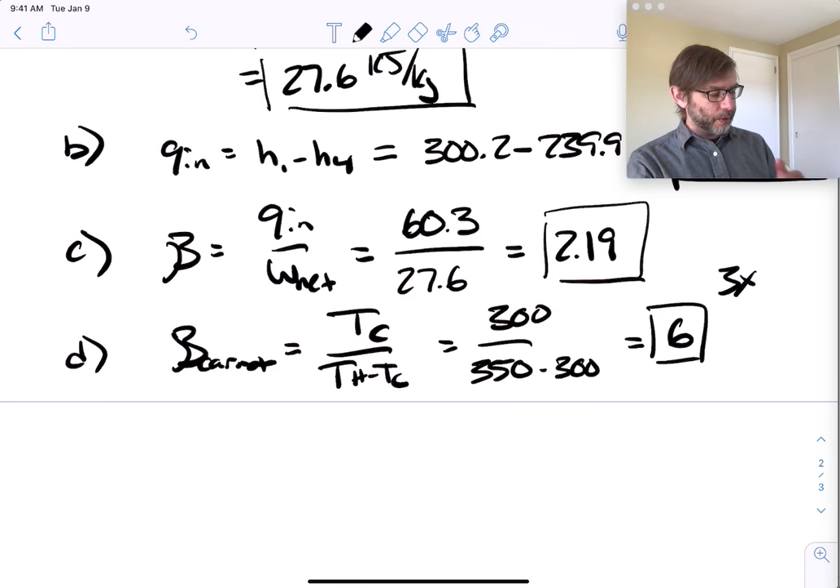So there's a big difference, about a factor of 3x. So it's not so bad, but it's probably pretty costly to use this system. I don't know, I'd like to see how it works. Obviously, if you could run this analysis with a bigger temperature difference, you'd see maybe something more difficult to achieve, because in the end we didn't solve for this temperature T3 or T2.

But it's something like 400 if the H is kind of similar, because CP is about 1 approximately. So T2 is going to be around 450K. So it's not too hot. You could probably get away with going higher than that. So I don't know, maybe it's worth checking out a Brayton refrigeration cycle.

But in the end, mostly we don't use Brayton refrigeration cycles. Mostly in any application, there's a vapor refrigeration cycle, probably because the amount of airflow you require is quite a bit, and a vapor is a lot easier to manage. So with that, I'm done.